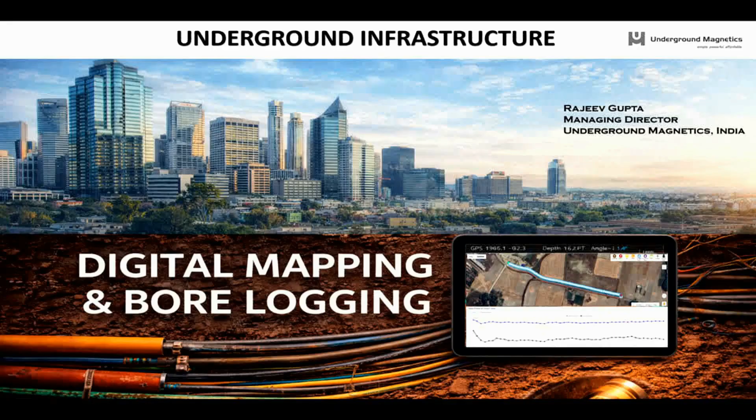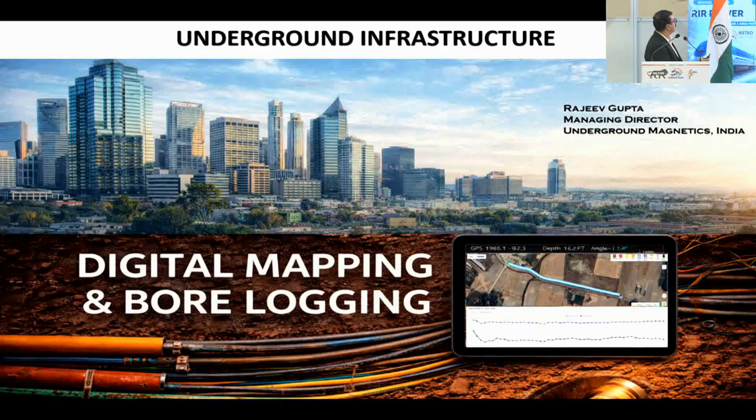So, this is an urban infrastructure. What are the growth drivers of underground infrastructure? It's water, fiber optics, sewer, oil and gas pipelines, power cables, city gas.

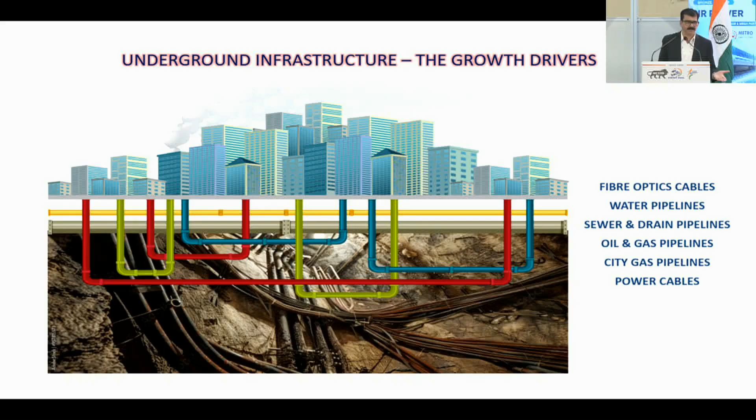So, urban infrastructure is standing on a big underground infrastructure. If you are standing here at Bharat Mandapam, there is a lot of underground infrastructure which is supporting this. Similarly, railways and others are also supported by underground infrastructure.

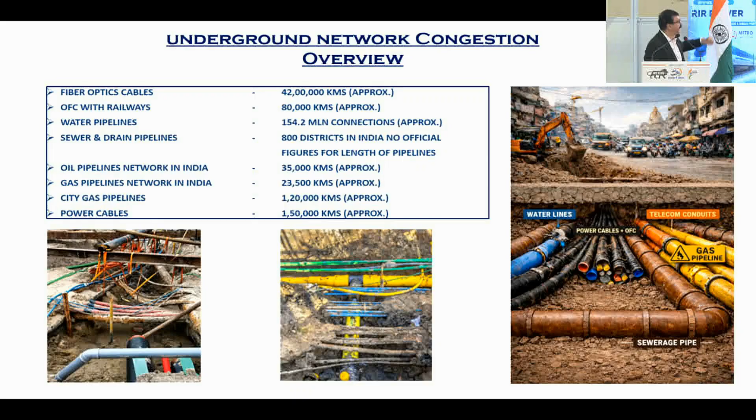This is an underground infrastructure congestion at present. There is close to 55 lakh kilometers of underground infrastructure at present in India, which includes fiber optics, approximately 42 lakh kilometers. OFC with railways is approximately 80,000 kilometers, and 154 million water connections. That also goes to households and commercials, and oil and gas pipeline network, city gas network, power line networks. So all this is already in place, and this is the forthcoming.

Approximately 20 lakh kilometers of underground infrastructure is to be laid. It is planned. BharatNet is coming with 8 lakh kilometers of fiber optics. RailTel is coming approximately 20,000 kilometers. Airtel is going to expand approximately 70,000 kilometers. BSNL, RJIL, Vodafone have their own expansions. Other internet service providers have their expansion close to 1 lakh kilometers.

Now with the power lines, roughly 1,50,000 kilometers of power lines is going to be underground. That's a mandate by the government at many places. Cities are to be beautified. Water, sewer and drain, Amrut 2 is on anvil, and approximately 6,50,000 kilometers of water pipelines would be laid under Jal Jeevan Mission. Jal Jeevan Mission, 35 million homes to be provided water.

So much infrastructure is coming below the ground. And if we talk about the energy baskets, roughly city gas is going to expand at 1,20,000 kilometers, but this is not enough. With the recent West Asia conflict, government came up with a gazette that 126 million LPG connections are to be converted to city gas, and there is already a gazette for that. So just imagine how much city gas pipelines are going to be below the ground.

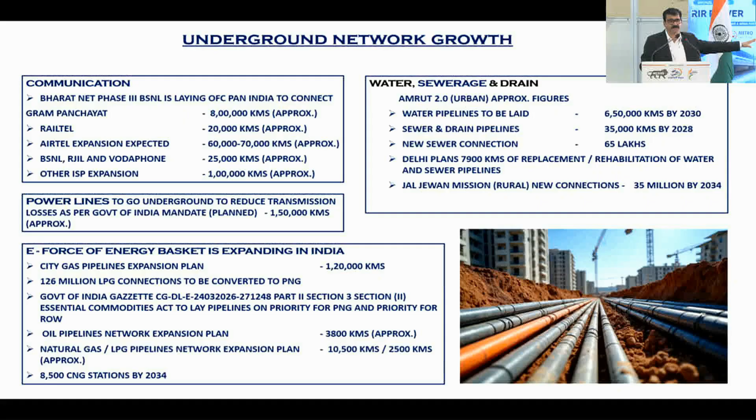Then we have the oil pipeline network, 8,500 CNG stations to be built new up to 2034. These are all rough figures, but they have been taken from authentic sources. What do we do?

What are the consequences? Haphazardly laid, no mapping of the underground infrastructure, so ROW is limited. Everything is going in the same ROW on the side of the railways or on the side of the roads. So we keep on damaging each other's infrastructure because there is no map below the ground.

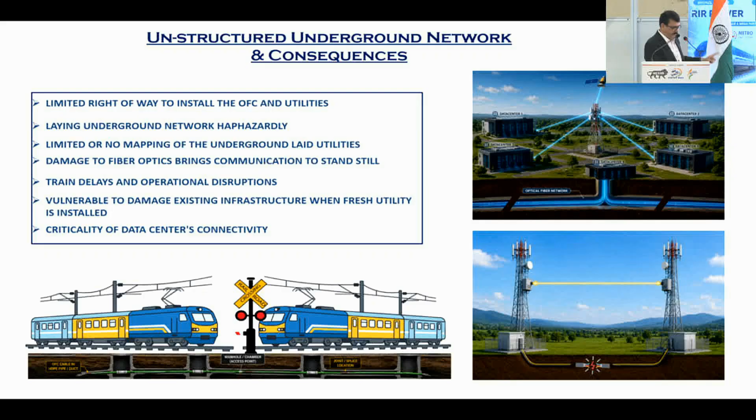If we start mapping - this is like if highways, this is if the water line is damaged, and other issues. Recently there was a case of Indore where contaminated water was consumed by some people and there was a fatality. So what happened is there was a sewer line and a water line going parallelly together.

Somebody must have drilled over the period and then all got mixed together and nobody noticed. Had there been a map of where the sewer was and where the water was, they could have saved it. They could have taken precautions. So we need to map everything.

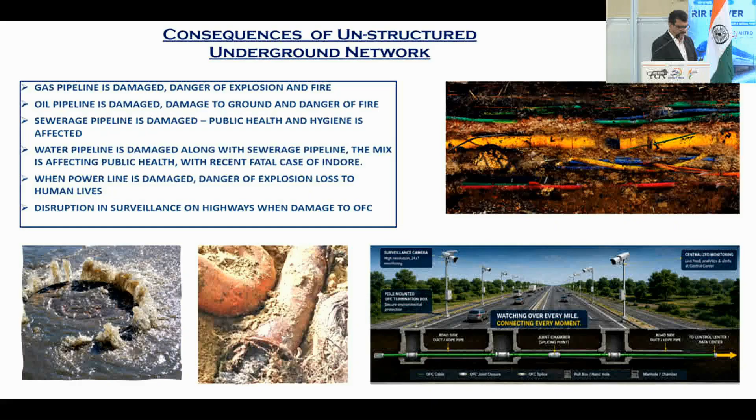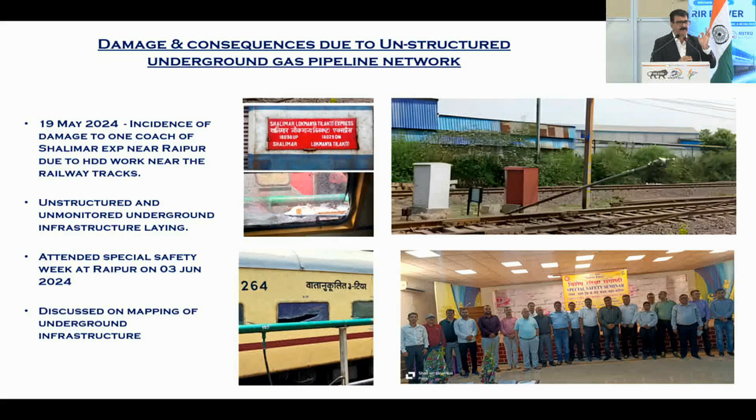I was called upon in 2024 to deliberate on safety during a safety week, and I did inform them: please map, please get everything under your control. There are systems in place. You can monitor the real-time data - who is drilling, where drilling is happening, where open trench work is going on. You can get every data online in office, from field to office directly, and that same data can go via API to your GIS platform, uninterrupted, with no manual intervention. Every data would be accurate.

How do we do this? We need to calibrate our GIS, Geographical Information System. A GIS is a platform, but it needs data, and it needs accurate data. If the data is accurate, your GIS is accurate.

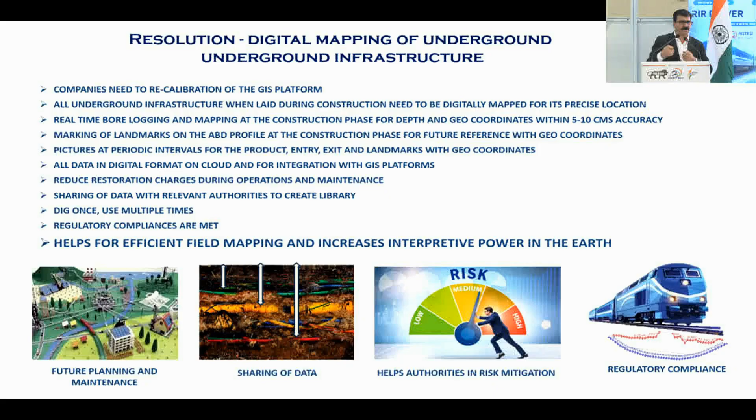Marking of landmarks and all underground infrastructure during the construction phase itself need to be mapped. Once you map it at the construction phase, you need not go again and again to redo your work and identify where your infrastructure is below the ground, as we currently do for railways or pipelines, going again to map and identify where the pipeline is. You need not do that. You do it once and use it multiple times.

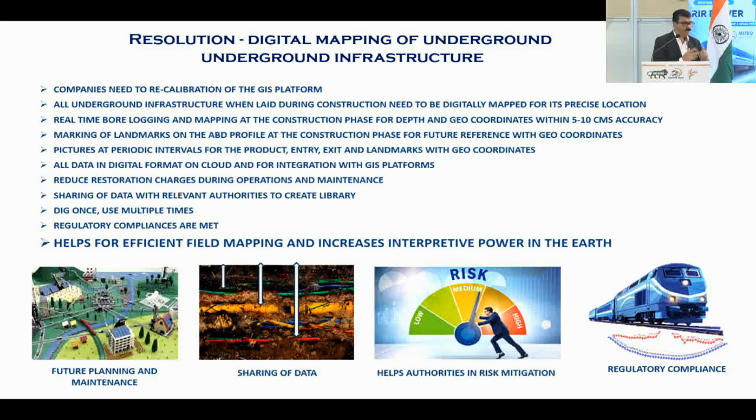Once you get a map, you get an increased interpretive power below the earth. You can see everything above the ground, but you can't see anything below the ground. A map is the only solution for your eyes there, letting you see below the ground where your utility is.

How do we achieve this? Underground magnetics equipment is being used, providing real-time data. When drilling is carried out, through the application and through Bluetooth, the data is absorbed on the Android device and sent straight to the server, and from the server it comes directly to your platform. The GPS is so accurate, using the coordinates, it is 5 to 10 centimeters accuracy.

Now with the depth and GPS coordinates, you get synchronous data. What we used to do was lay it and then come again to try to get the GPS data, which misaligns. Now this is aligned and synchronous data, all coming together.

For road and railway offset tracks, you can get the offset from the center, how much you are laying towards your utility. You can get that offset, so if in the future your road expands, you know what the center of the road is.

And this data can be integrated directly using API through GIS, with multiple capturing and multiple views. With BharatNet, our machines are being used, 250 machines are operating for RVNL.

RVNL has taken UP East, UP West, and with Polycab, Bihar, Karnataka, Pondicherry and Goa, and with Dilip Buildcon, Jammu and Kashmir. They all get the real-time data into their GIS, and simultaneously this data is viewed by the Ministry of Communication and BSNL.

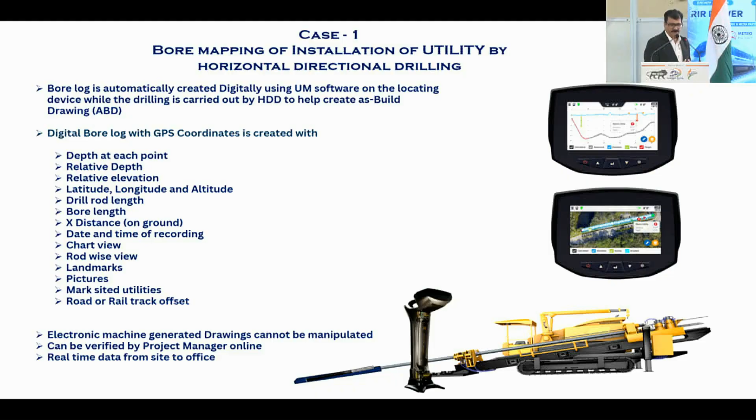And here's how the report looks - we generate this report. You can see this data live on your computer anytime, with date and time, so it cannot be manipulated.

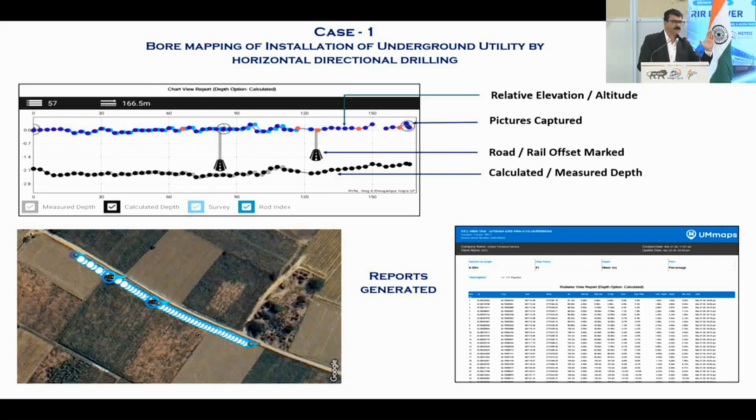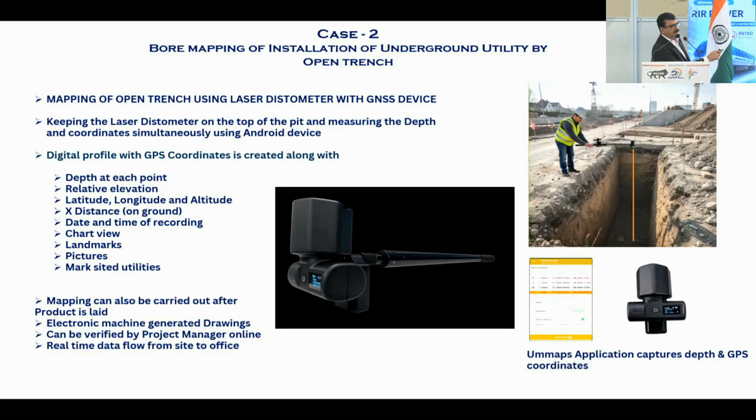This was one case scenario. Next case: when you are doing an open trench, we have a device with a laser to measure the depth of the open trench, and simultaneously capture the depth and GPS coordinates using the application, and this is the report we generate.

Third case: when there is already a laid OFC, duct, or gas pipeline that does not have anything inside - especially when the OFC is not there inside - we can map it the same way by putting in the transmitter. Yesterday my person was in Visakhapatnam doing this for Airtel, who wants their OFC duct, which doesn't have OFC inside, to be mapped.

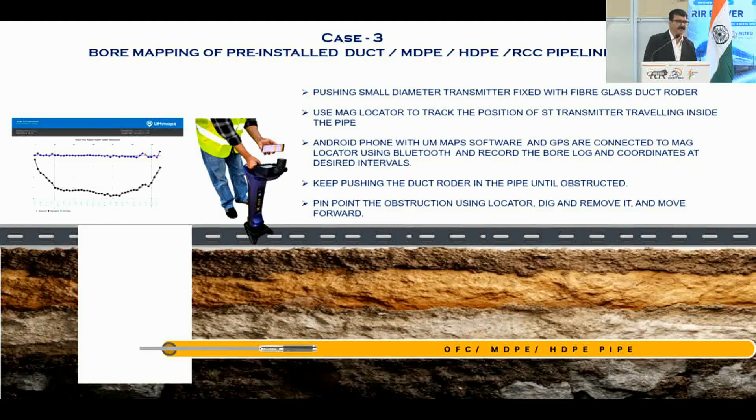I cannot declare the numbers here, but the number is huge. They don't have the mapping.

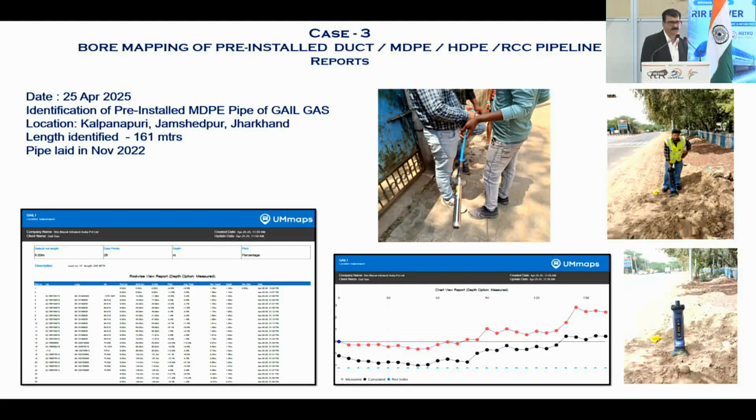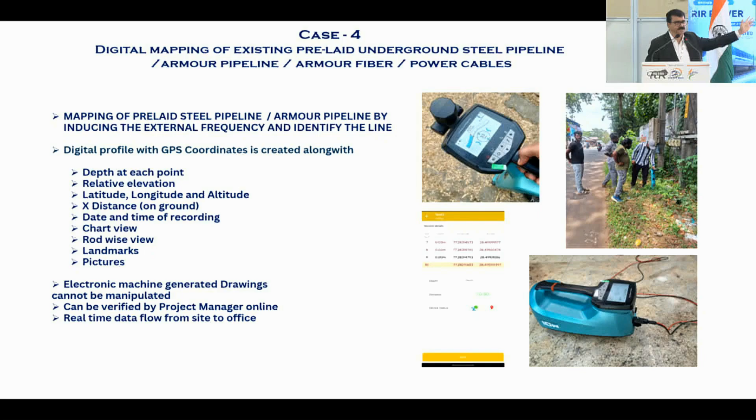This is when you already have an armored fiber, which is presently in practice in railways or other places - you have an armored fiber already laid over the years and want to identify it. Using a pipe and cable locator with GPS, we can map everything and get you this report, with all the data flowing real time to your place.

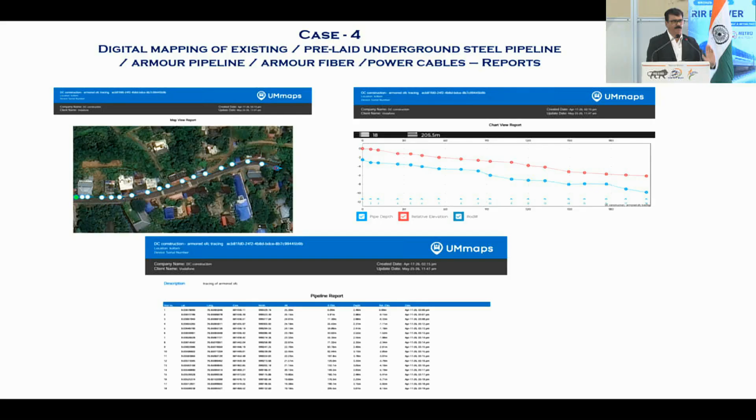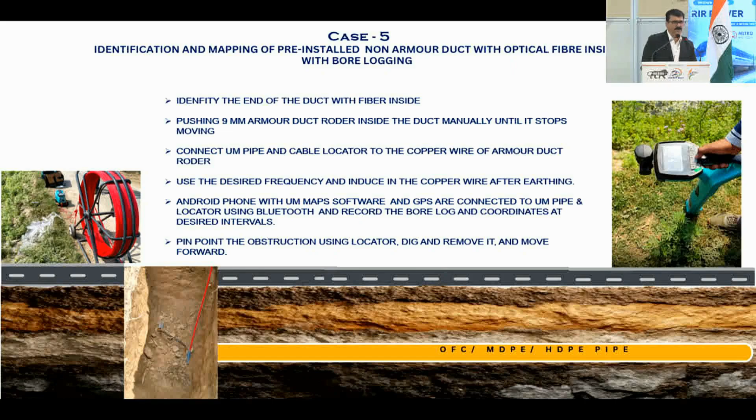This is the case scenario where there is already a duct inside. We did this for BharatNet at one place where the duct was already installed. We pushed a duct rodder of 9mm, the minimum space available, which was an armored duct rodder, and connected our pipe and cable locator to identify the entire route. This was the report generated.

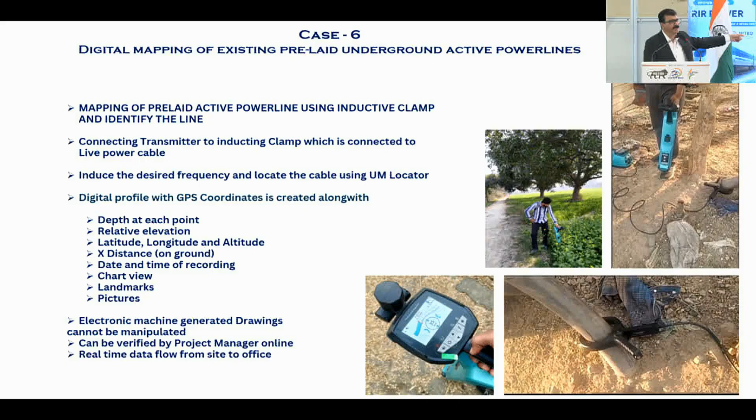This is for the power lines. Similarly, our pipe and cable locators can be hooked with the power line - just hook below and then induce a frequency and map the entire power line.

Now, who is adopting this technology? These are some case studies we did. Railway crossings - most of our equipment is being used for railway crossings and near the railways.

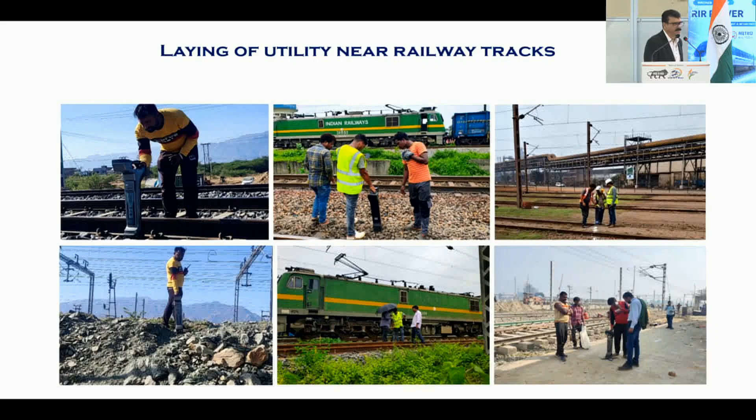What is the initiative? BharatNet is using this. We are in talks with the gas companies - Think Gas is talking to us, GAIL Gas is talking to us.

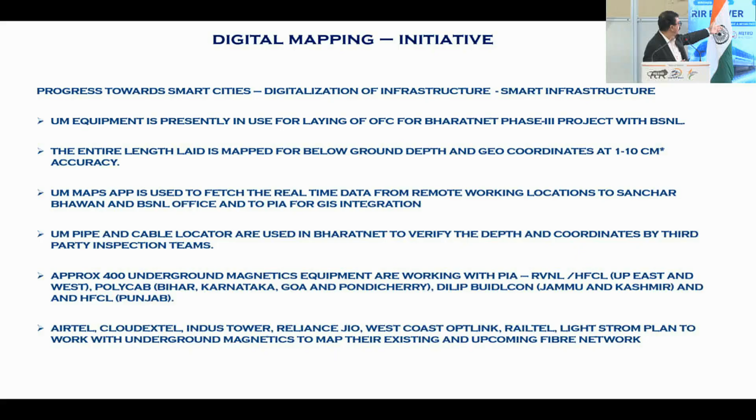GAIL - we have been meeting ED Shri A.K. Tripathi, and he is going to mandate that all pipelines going inside need to be mapped at the construction phase. We have also been talking to telecom companies - CloudExtel, Indus Towers, Reliance, West Coast Optlink, RailTel, and Lightstorm.

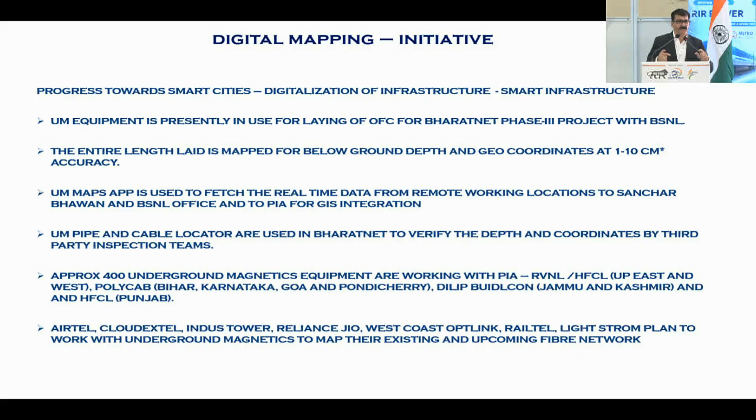Lightstorm is laying their fiber optics in Maharashtra and southern India for data centers, and they are very critical. Just to tell you, there are approximately 150 cuts for telecommunications, and each cut restoration cost is approximately 50,000. So if we map our utilities, we can reduce these restoration costs.

Amrut 2 is going to do this, and we are in talks with urban infrastructure - whenever you are laying water pipelines, they are not doing the ABD, which is the major part for laying any pipelines underground.

We are also in talks with Delhi Jal Board and NDMC. We did a pilot project for them, identifying their sewers which are more than 80 years old, where they don't know the route. One we identified, we came to know that the Air Force quarters had been built over it - the drain was more than 80 years old.

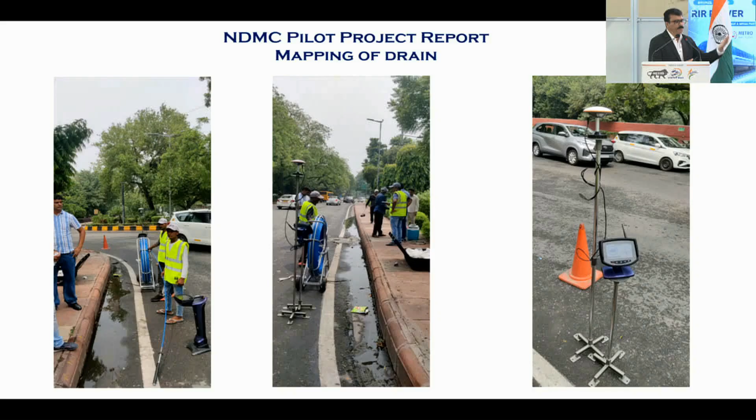This is the one we did with the NDMC, near the Taj Hotel. We identified 8 manholes there - they were not able to identify which connected to which. Using the same technology, we pushed our transmitter inside, got the geo coordinates, and mapped their drains and sewers. This we did for NDMC.